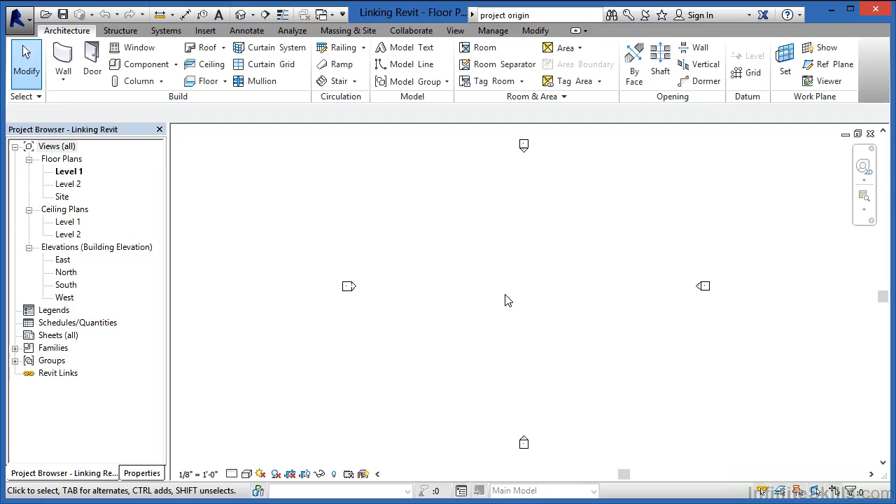The steps to doing that will be coming up to the Insert tab on the ribbon, then over toward the left-hand side, selecting on Link Revit. What I'd like to bring in is this project called Revit Project. Now, perhaps the most important part is down here where it says Positioning. What you want to do is Auto - Origin to Origin.

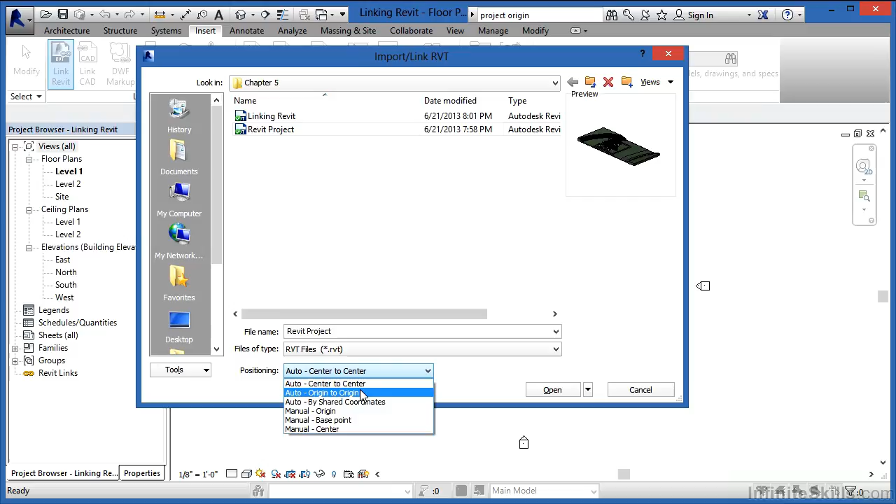Now, depending on the setup, you may even do shared coordinates if it's multiple buildings, like a multiple building campus. But for the most part, you're going to do origin to origin so that your base point matches up with the base point of the original Revit project. That way, if anything changes in that original project, it won't get shifted or moved on you inside of your own project environment. Pick on Auto - Origin to Origin, and now select on Open.

And we can see now that the building is in place. I'm going to zoom out a little bit so we can see it. Here we can see the building and the entire site. The next thing you'd want to do after actually bringing it in is go to an elevation view and take a look at how it looks in an elevation view.

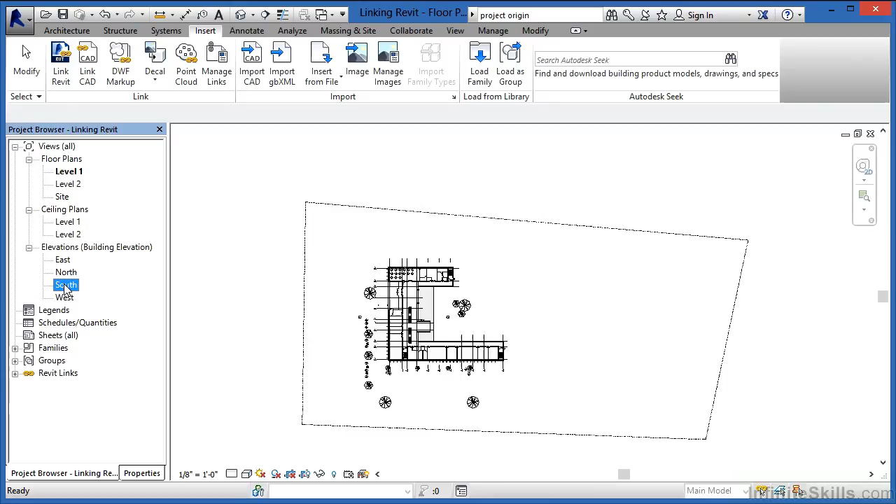I'm going to zoom in here. Here we can see the nice big project, and we can see each of these individual levels that make up this project. But what I want to do is find where my own levels are located at. Right now, it's really kind of buried. I'm not even sure where my own levels are at. I'm going to begin by trying to find them by doing a zoom extents, which is just a matter of either typing ZE on the keyboard or double-clicking the wheel on the mouse.

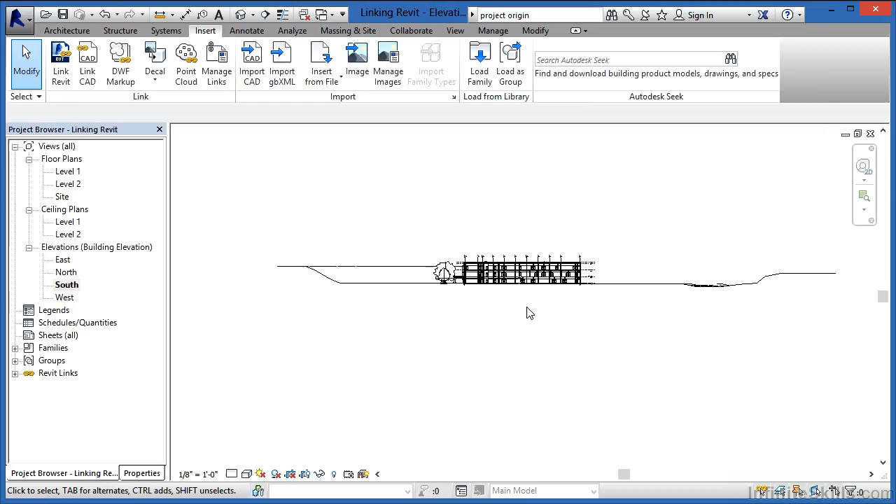Since my levels didn't show up immediately, I'm starting to wonder if maybe I just need to hide my project to be able to see them. But now that I'm moving my mouse over it, I can see something lighting up here. That's probably one of my levels. So I'm going to zoom in here, right toward the middle of the building, and we can see here are the levels from my own template.

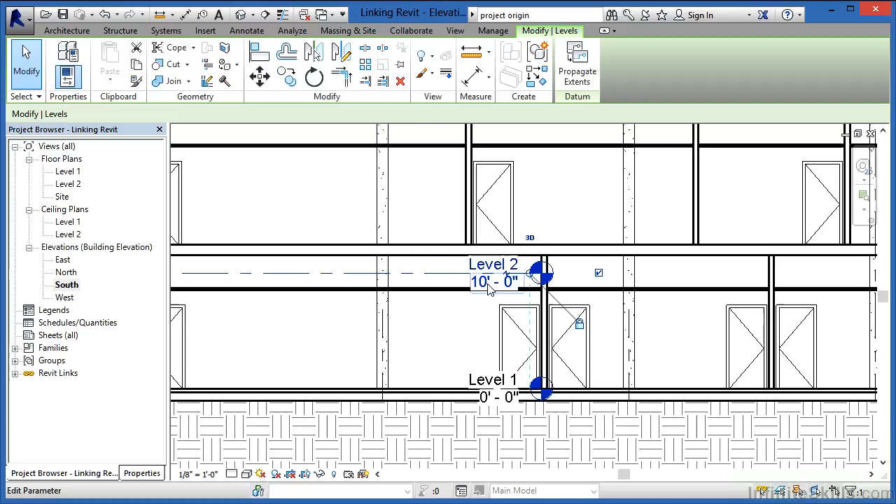What I can do at this point is I can move these levels by just clicking on them and then either typing in the appropriate dimension, such as in this case, this metric dimension of 3800, or I can click on them and drag them up in line with where we need them to be. At this point, we could even grab on the little dots and then drag these levels out in order to get them into a better location.

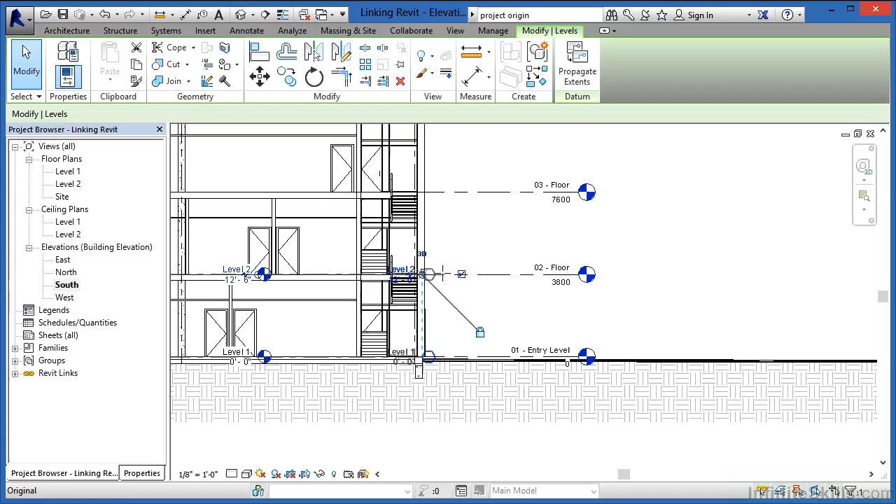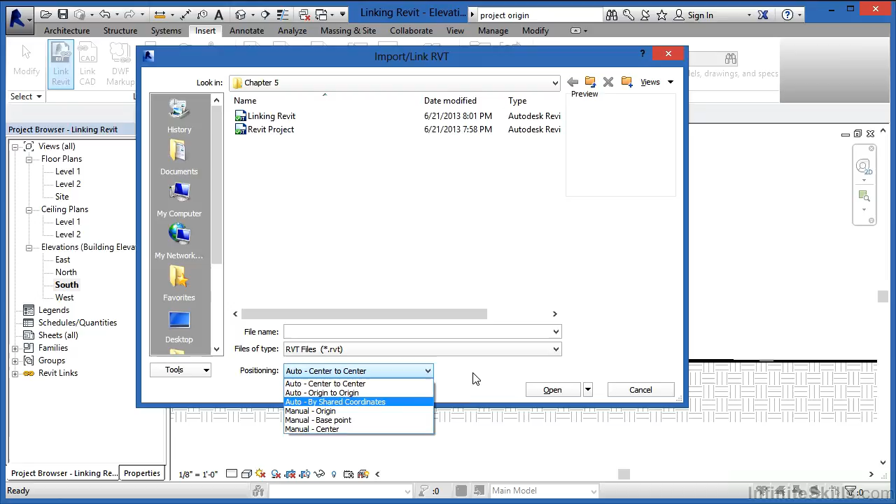So whenever you're going to link in a Revit project, there's probably two things to really be concerned with. One is making sure that your levels match up, because you want to be drawn on the same level as what the original building was drawn at. The second thing that you need to be concerned with is remember when you insert this in, and I'll just come up here to Link Revit so we can see it, to always change it to be Auto - Origin to Origin.

That way your origin point is the same in your project as well as inside of this project that got linked in. And as a result of that, if this project should ever get changed, whenever it updates inside of your project environment, it'll stay at the same elevation, the same point, so you won't have to readjust your levels again and then readjust everything that you modeled so it lines up with the building.